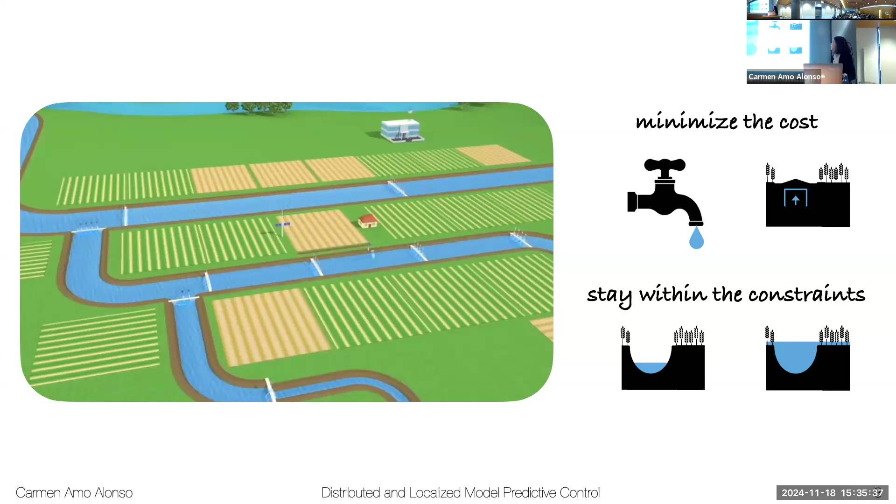And if we wanted to control this plantation, say that we want to minimize the cost of the water we're spending and the energy that we spend on moving the gates, and we want to do that staying within the constraints. So as we saw on Friday, we don't want to overflow, but also we don't want to have such a low level that we don't get to water the plants. And we also saw on Friday that we do this with a controller.

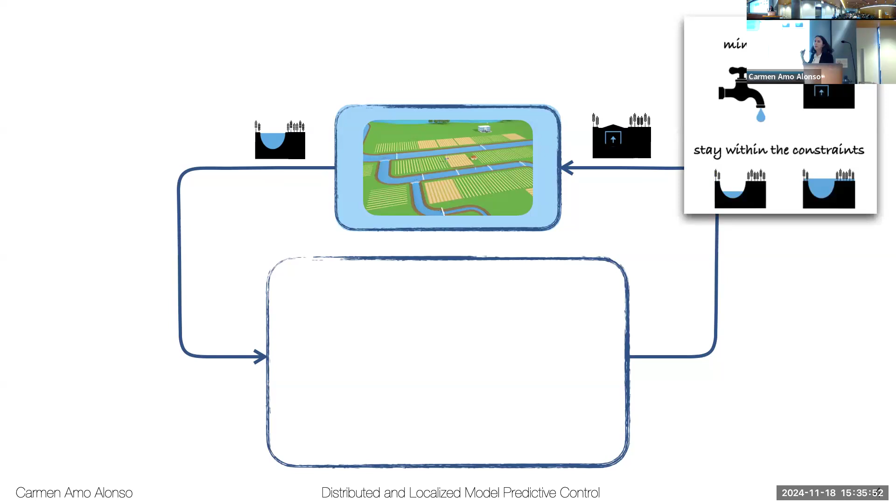So the way we do this is we measure the water level, and the controller tells us how we have to actuate the gates to regulate this water level. And we do that by taking into account the considerations that I just mentioned. So we want to minimize the cost. And now we're writing this a little bit more mathematically than we did on Friday.

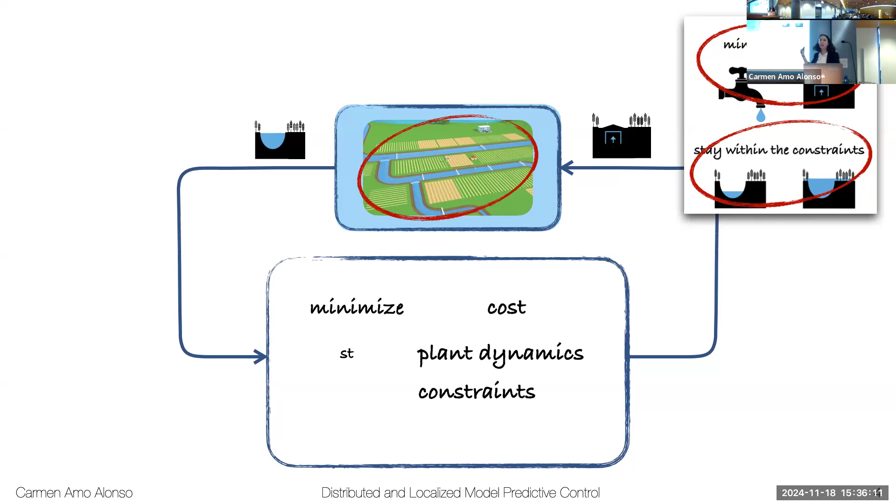We want to minimize the cost, and we want to subject that to the plant dynamics, because ultimately we want to account for the dynamics that we had originally. And we want to stay within the constraints. So we want to also account for the constraints on the water level. And we want to account for the initial condition for where we start, the measurement that we just took.

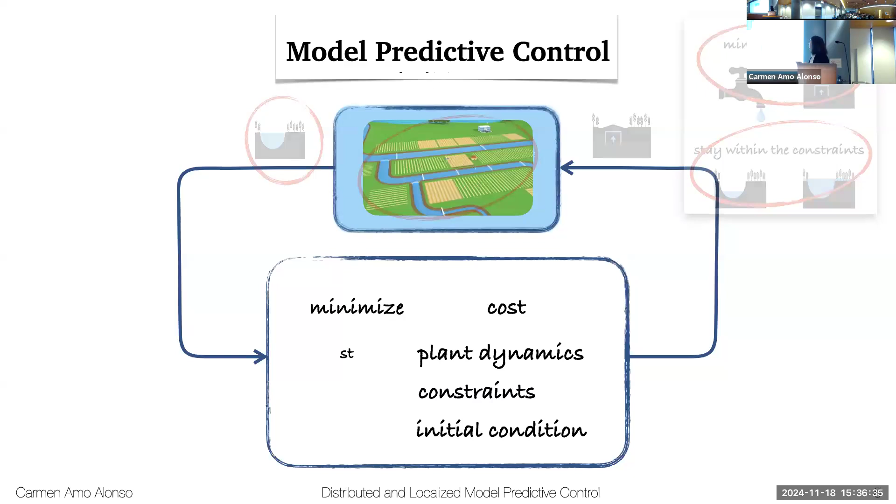We also want to put that in there into the optimization. And the usual way of solving this problem is with this method that's called model predictive control. And the way it works is the following. Actually, before I do that, let me show you mathematically. This is how we write it. So here I'm going to have this cost function. I'm just asking for this function to be convex.

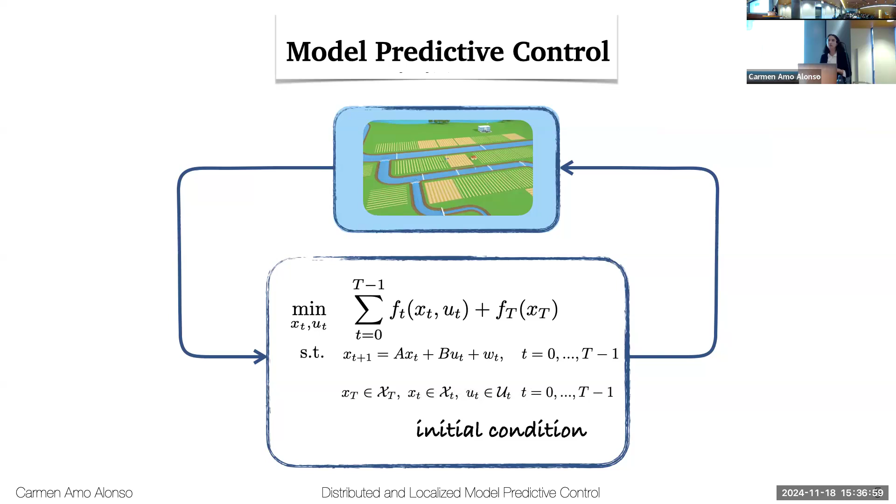For the dynamics of the system, this is how I'm going to write them. I'm assuming that this is a linear system. Here I have my constraints. I'm just requiring that these sets are convex. Again, that's the only assumption that I'm going to put into that. And this is how I write the initial condition. So this is how we formulate the problem that I just described mathematically.

And now let me tell you how model predictive control works. It takes the measurement from the water level in this case, and it puts it as the initial condition for the dynamics in this optimization problem. Now, we solve this optimization problem for the control input. We have a series of inputs that we have to apply until time t, but we only take the first one, and that's the one we apply to the plant. And we keep going recursively.

By plants, do you mean the things that are in the ground? By plant, sorry, in control theory, we call the plant the blue square, the system that we want to control. That's our plant.

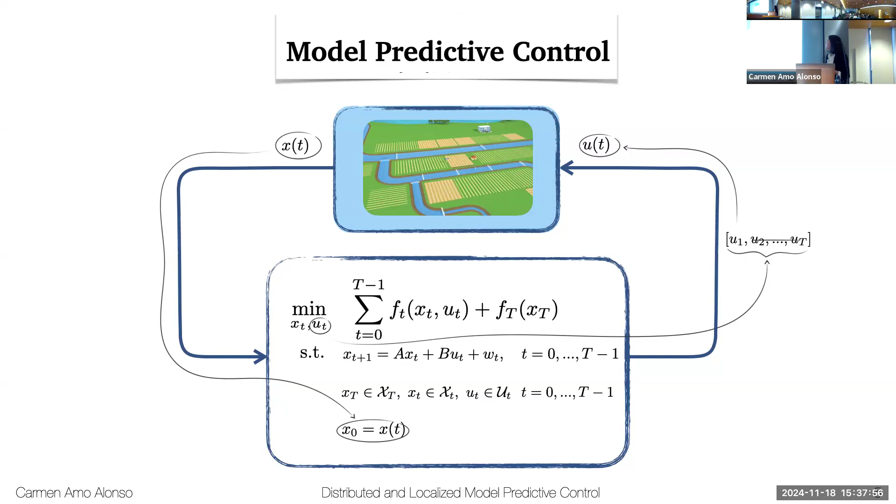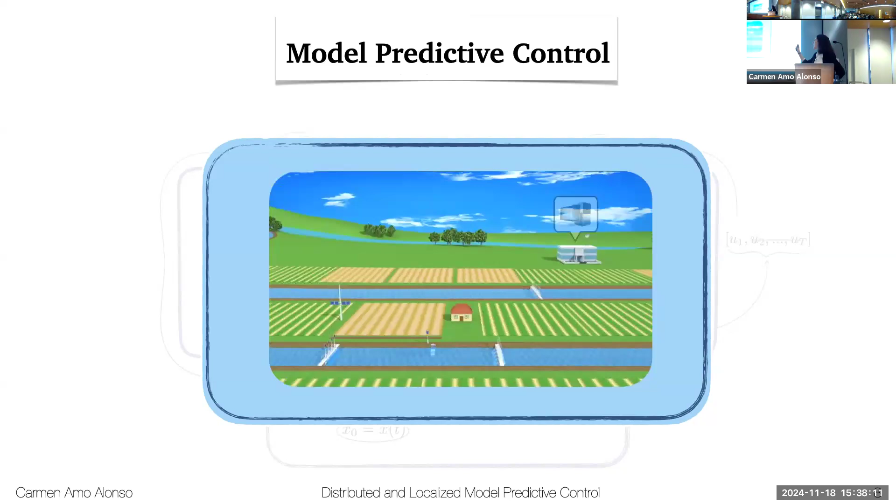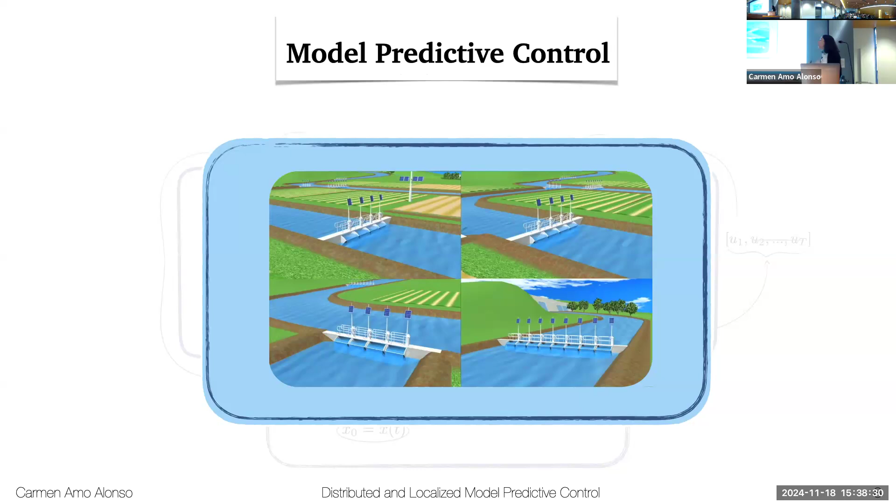So this has been applied to many different systems, and this is how it would work in this setting. Here, the decision is made in the centralized controller, and then it's distributed to the different gates, and the gates actuate according to the information they receive. But the question we asked here is, what happens if we wanted for each of these gates to have agency and make their own decisions, coordinating only with a few neighbors? What if we wanted our system to look something like this?

And this is the case for many systems that we have to deal with nowadays, like the internet, the power network, autonomous vehicles, or even the gut microbiome. Those are big networks where a system is only connected to a few neighbors. So we have to deal with these large scale networks. Something we could do is just put this network inside the system and treat it as we normally would. But by doing that, we would, first of all, miss all the structure that the network has. And in this talk, we're going to see that exploiting this structure is very important.

And also, this would be computationally very costly and sometimes even infeasible, because we have all this distributed system, say the power network. Where do we put this controller? And it has to do this huge computation because we have so many variables. So in control theory, people have been developing this framework of distributed model predictive control. And in this framework, the concern people had is that it's very sparse. So the global information exchanges that we achieve in the centralized setting cannot really be ported to the distributed setting because of the sparsity. So they saw that as a problem.

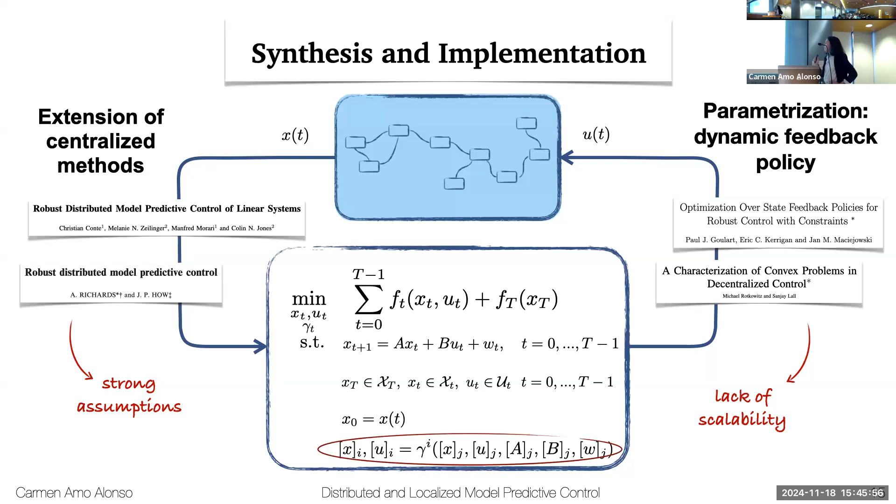But the problem is, how do we solve this? And solving this problem is not easy, because if you know anything about optimization, we're restricting the dependencies of our decision variables. So it's not clear how to solve that. You need some specific parameterization, and we're gonna make use of the system level synthesis parameterization to solve this.

And so let me give you a very quick tutorial on the system level synthesis parameterization. So if you have a control system, a closed loop system, you can write its dynamics in this way.

And just for simplicity, I'm gonna go all the way until time t. From time equal 1 to time t, I'm gonna write it down, and then I'm gonna organize it in this matrix form. And this is how I can alternatively write the dynamics. So this is just notation. I just choose to write the dynamics in this way, and it's gonna come clear why in a second.

I can do the same thing for the controller. So now the controller, this is a convolution over the state. So if I were to write this down for every time t, I'm gonna have something that looks like this, where the K is block lower triangular, and I can just replace this equation by this other one in matrix form. Again, this is just pure notation.

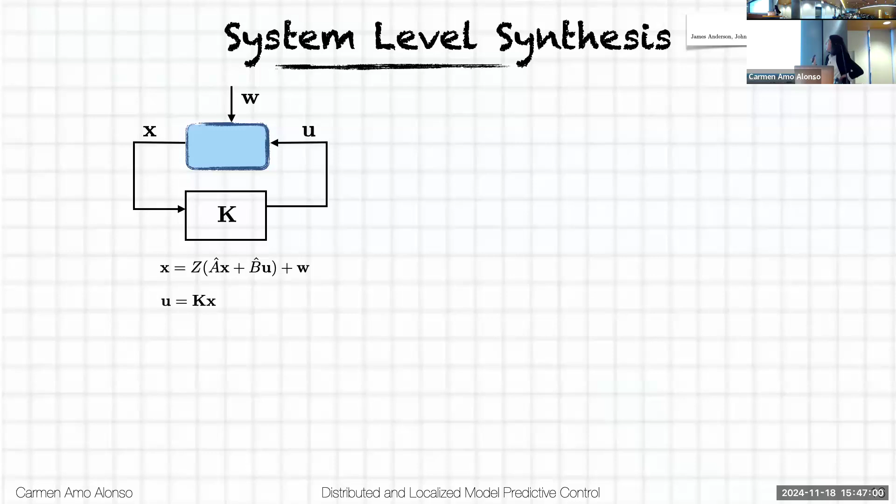And what the system level synthesis framework does is it says, well, I don't want to make the distinction between what the controller is and what the plant or the system is. I just care about what the closed loop behavior of the system is. How does my system behave once the controller is plugged in? So this is what the system level synthesis framework cares about. And instead of having this distinction of plant versus controller, I only need to care about these two closed loop maps, phi x and phi u.

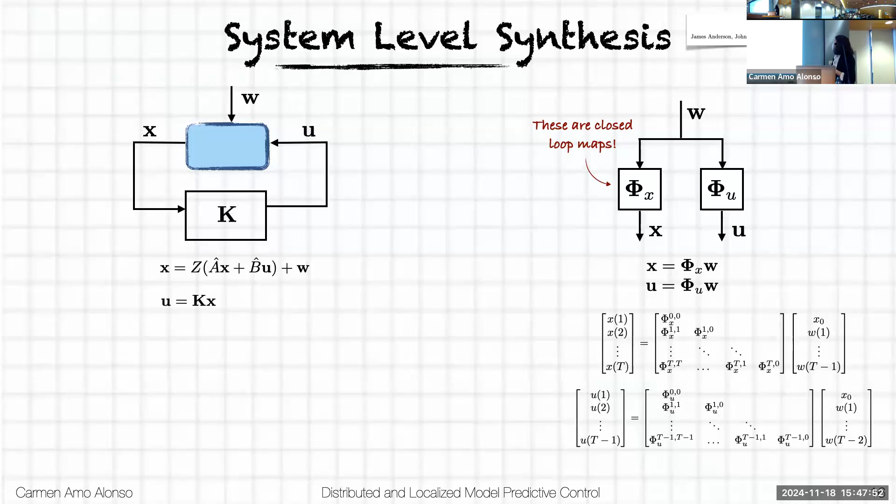So these are the new equations that are gonna describe how my system behaves, as opposed to these other two that we had on the left that were making the distinction between plant and controller. And the structure of these maps is block lower triangular, as they were for K, for the controller. And the question that could come up here is, well, how do you know that these equations on the right are capturing anything about the system, the blue system on the left?

And here's where the SLS theorem comes into play, because it tells us that when the closed loop maps live in this affine subspace, they're parameterizing all the possible system responses of the system. So this is enough. We know that if we put that constraint in, we're capturing the dynamics of the system.

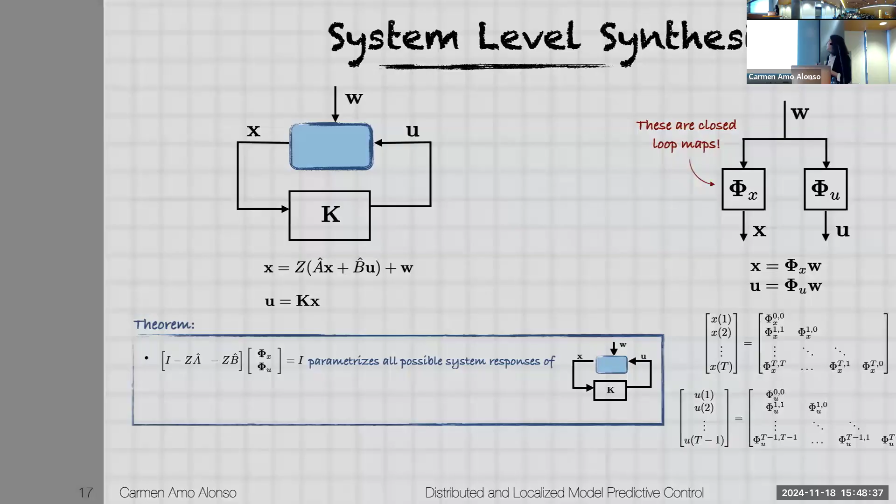So now what we can do is we can go back and literally just perform a change of variables. We know that we can write the state as a map from the disturbance, and same thing with the input. So we can go into the formulation that we had before and just literally perform this change of variables. So this is what the cost and the constraints are going to look like. I'm just replacing the state and the input by these maps here.

And now for the constraint, if you remember, this constraint right here was the constraint that was capturing the dynamics of my system, the evolution of my system. And by the SLS theorem, we know that when the maps sit in that subspace, they are already capturing the dynamics of the system. So that's enough. I can do that. But I still haven't told you how this parameterization can help me with the locality constraints. So we can do that now.

So we can go back, and the second statement of the SLS theorem says that this controller achieves the desired response. This is important because it's telling us that the structure that we put in the closed loop responses is going to translate into the controller. And the reason for that is you see the controller there, and we can implement the controller in this way, where phi x and phi u appear directly.

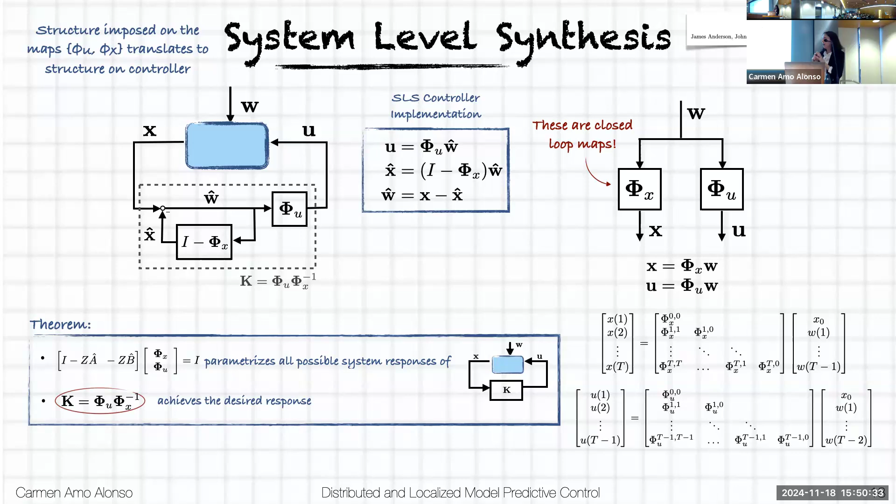And the reason why that's important is because, again, phi x and phi u, I'm optimizing over them. They're my decision variables. So I can choose the structure that I want for them, and that structure is going to directly translate into the controller. So let me explicitly show what that looks like.

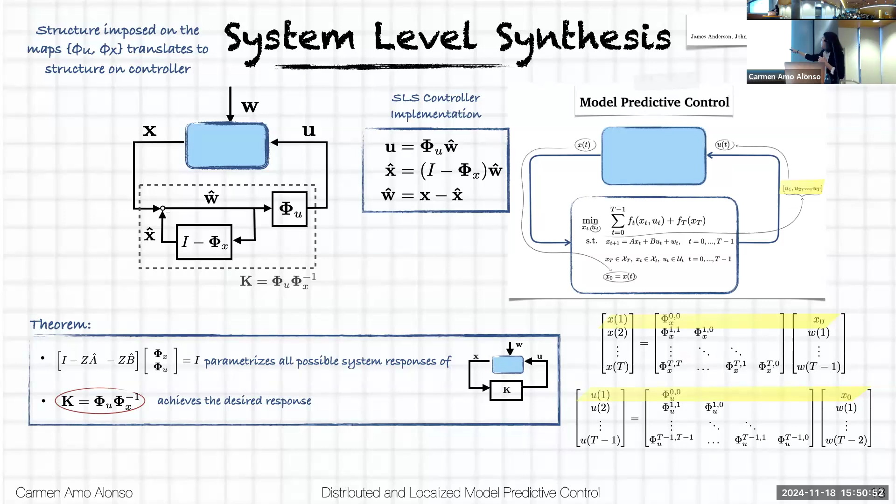It would apply even if we weren't in this setting, but just to make it simpler, because we're in this model predictive control framework, we're only taking the first input that we apply to the system. So that means we only need to worry about that one matrix over there. So I'm gonna write it out explicitly. This is my matrix. And if I have a 3-node network, it's gonna look something like this.

The structure imposed on the maps phi x and phi u translates to structure in the controller, because again, these are my decision variables. So I can choose the structure that they have, and I can just set these components to be 0. And if I do that, then I don't need this communication link anymore. And now, of course, this needs to be feasible. If those subsystems are dynamically connected, then I'm not going to be able to do that. It's going to be infeasible.

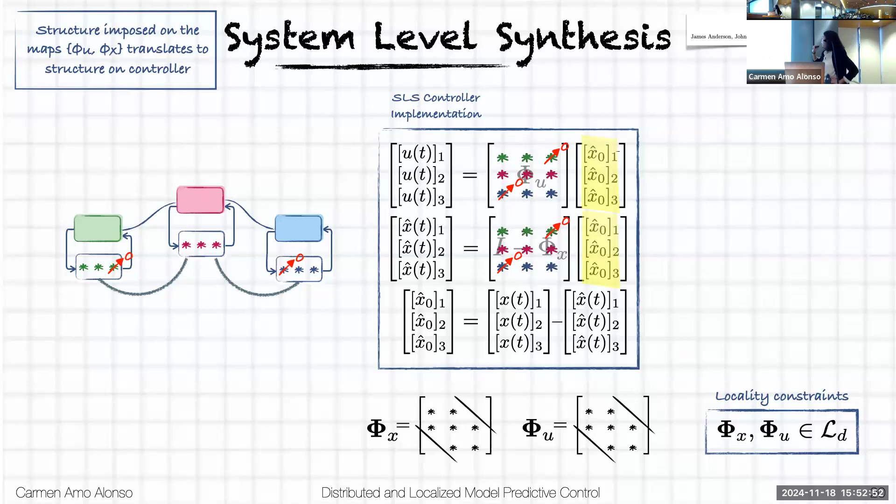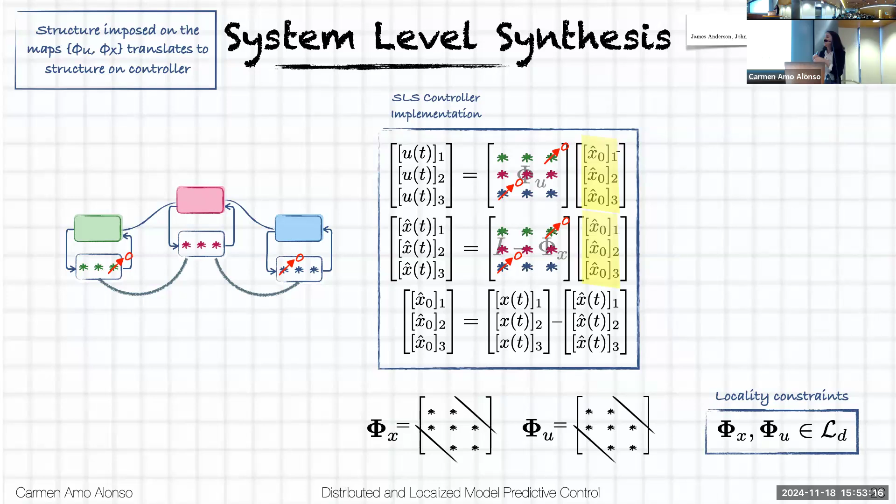But in very large networks where I have something that's sparse to begin with, I can get away with this kind of constraint. So I can set to 0 many components, and that's fine. And so these are the locality constraints. So I really want to emphasize here that just by setting some components to 0, I'm achieving precisely what I said I wanted to do at the beginning of the talk, which was making sure that my subsystem does not depend on anything else outside its neighborhood. So in this case, green subsystem does not depend on blue subsystem. And I've created that neighborhood, and it was as easy as just setting some components to 0.

So we can go back and replace that constraint by the locality constraint, which is just zeroing out things. So that's easy. And I just achieved the distributed and localized implementation, because we can implement the controllers in the way I just described, and that is localized in nature.

Do you have a question? Do you forcefully set it to 0, or do you find that you can't set it to 0? I set it to 0, and then I check whether it's feasible. But we can talk about what size we need. I can talk about that later. Yes. You have a characterization of feasibility? No, I don't. I only have one result that tells me when the D that you choose is as optimal as if you didn't have locality constraints, but I can comment on that later.

Yes. What if, for a specific agent I, your neighbors are changing over time? Because as you move along your trajectory, you might lose your communication with some specific neighbors, and then you may create another communication with another agent. So do you have that kind of time varying communications with neighbors embedded? No, so everything I'm describing here is for a fixed topology. I don't have a changing communication topology. I think you could put in a changing communication topology, and most things would go through just fine. And the framework definitely allows for that, but I don't have that in the theory. I don't have that work done. Yeah.

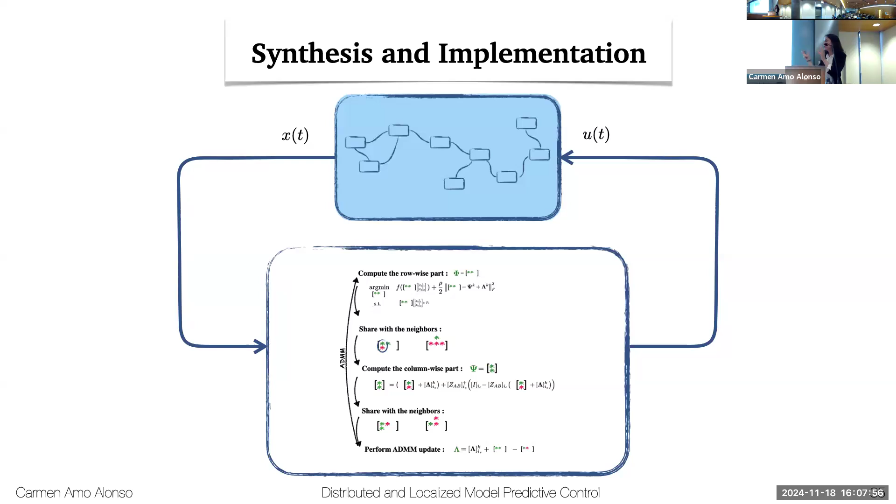keep going recursively. And so in this way, we not only know how to build those little controllers that are distributed for each of the subsystems, but we also know how to perform the computation, enabling communication exchanges that only happen at a local scale, so that the computations also occur locally for each of the subsystems. So we have something like this, which is what we wanted.

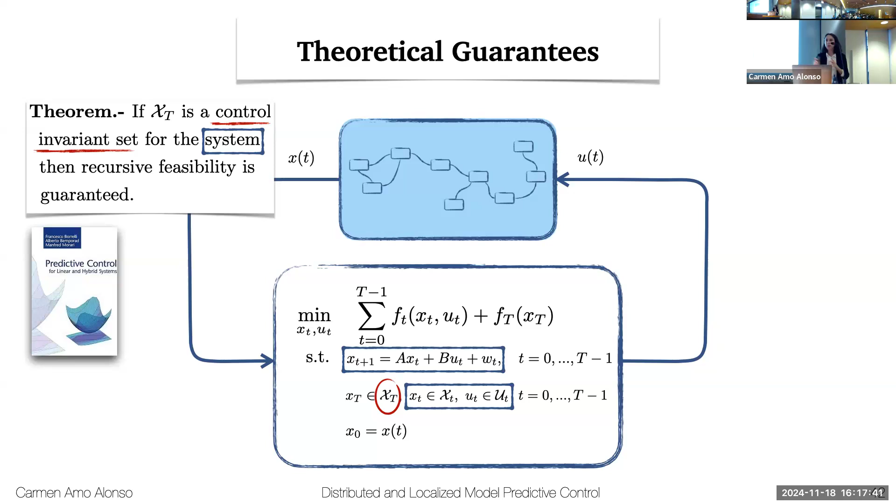Now, computing control invariant sets is hard, especially in a distributed setting, because it's a problem that scales very badly. So we were able to, thanks to the locality constraints, compute that in a very nice way and provide a solution to this problem. And I'm going to show you in simulation why that's nice. So we're able to guarantee recursive feasibility.

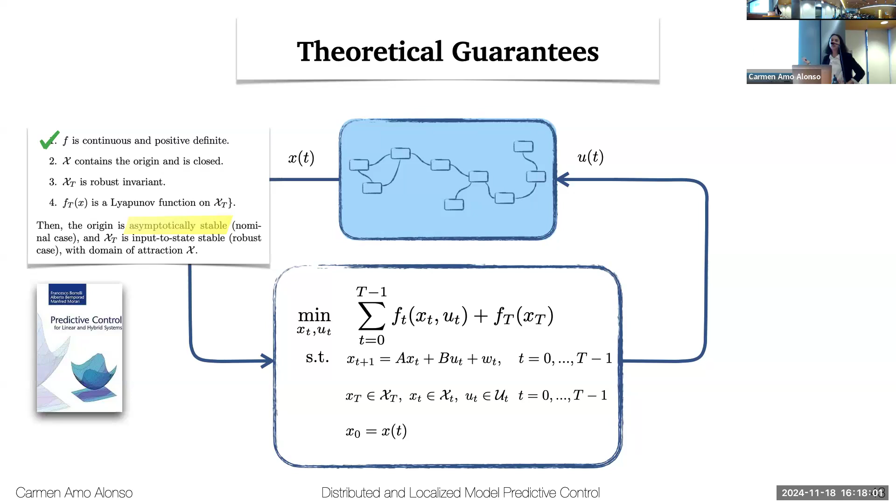And now for asymptotic stability, there's this other theorem that says, basically, it's a lot of conditions. So the cost has to be continuous and positive definite. That's our choice. The constraints have to contain the origin and be closed. Again, that's our choice. The terminal set has to be robust invariant, which again, we just talked about. And then the other condition that they put is on this terminal cost. So this terminal cost has to be a Lyapunov function on the terminal set.

And in order to make this a Lyapunov function, we need to break some of the assumptions that I explained to you at the beginning. So then we had to extend our framework a little bit more so that you talk to the neighbors a little bit more. There's more communication exchanges that are required. But other than that, it goes through just fine. I'm not going to go through the mathematical details, but I just really wanted to give the intuition.

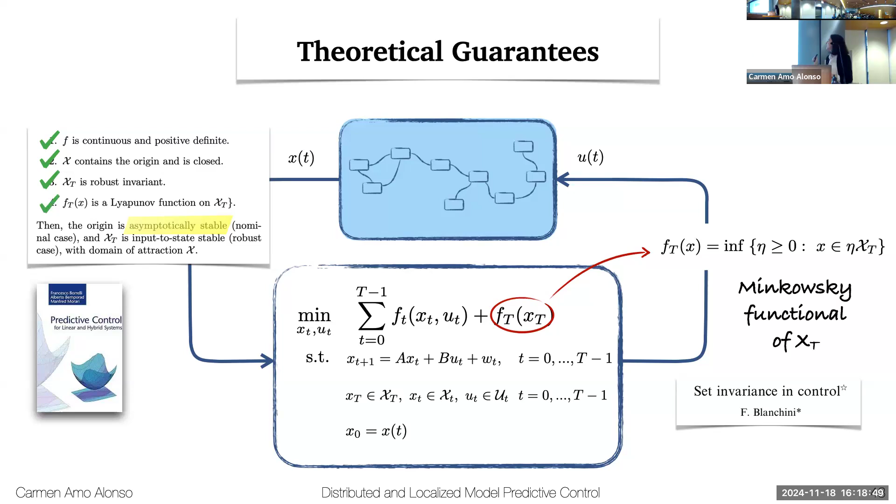What ends up happening is something like this. So we're able to compute the terminal set offline, and it's really the biggest set you could compute. So it's really non-conservative. Usually, what would happen in the literature before is either people compute this online to try to make it non-conservative, but then you're putting a burden on your online runtime, or if you compute it offline, then you're very conservative. Because if you set your set to be the 0, then that's fine, but that's very conservative. So our computation allows for a very non-conservative set offline.

But what about finding a model? So that's what we did to solve that problem. But what about finding a model to begin with for that network? That's already really hard, because this model is very big, and how do we model that? So we need to do data-driven SLS. So just very briefly, there's this Willems lemma that tells us that we can parameterize the state and the input of my system with just past trajectories, and the matrices have to be full rank.

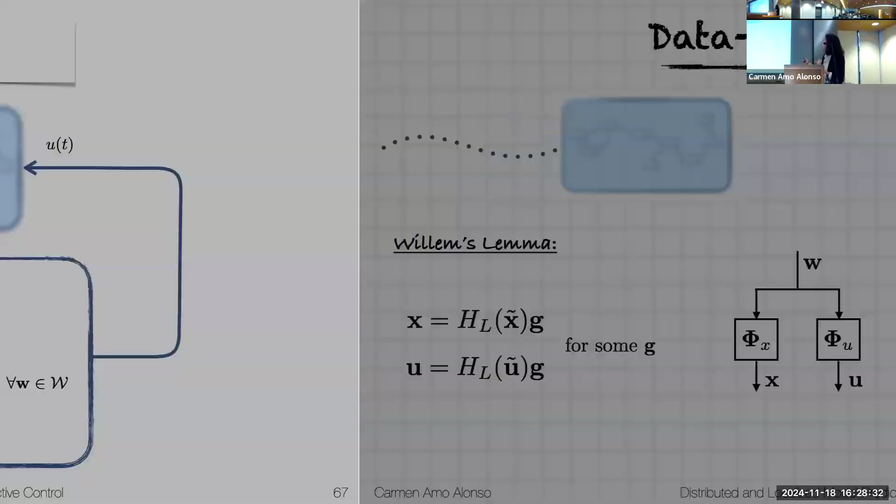So we have something like this, and we want to translate that into the SLS framework, and that looks something like this in SLS. So the only important thing here is that we can go back and just account for that. So we're going to replace the constraint that had a model by the constraint that just contains data. But doing this in a localized way now becomes hard, because we put in this new G matrix there that's a decision variable, and so how to solve for that is tricky.

So let me just give an intuition on how to do that. We basically have this constraint linking phi and G, and we know that phi is localized, but what do we know about G? So the first thing we want to do is to ensure that G has some sort of locality, because otherwise, if now my subsystems have to solve for this full G, then I'm breaking the whole claim that I made at the beginning, that they only had to solve for little patches. So in order to make that 0, I'm going to have to perform this computation.

And so what that means is that now green subsystem has to go talk to blue, orange, and yellow in order to make that happen. So I'm going to need all of those communication links. But thankfully, we proved that it's enough for it to talk to blue, and then blue can pass on the information, and that's all we need. So that's good. We know we don't need all the communication links, and we proved that.

But the second thing you would think we need is, in order for this matrix with the trajectories to be full rank, we need to capture trajectories from everybody. So again, I would need to talk to them to know what trajectories we had all across the network in order to solve this thing and have it be complete. But again, we proved that that wasn't necessary. It's enough for you to talk to people in your neighborhood, and that's enough.